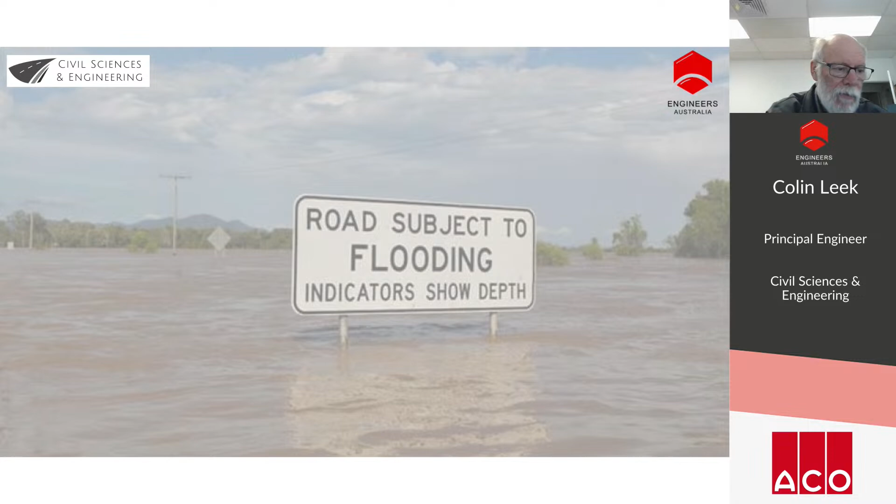Our aim with surface water drainage is basically very simple. We just want to remove that excess water from the road surface, generally following a rain event, although it can be a burst water main. And we want to drain that into a drainage system in a controlled manner as quickly and effectively as possible.

The outcome is a wet but dry road or pathway, but the problem we have is that we do have contaminated runoff.

This has been something that's concerned me for a long time, is where does all the rubber from the tyres go? If you do a little bit of research, you can find that the average life of a passenger vehicle tyre is 40,000 kilometres. And for a heavy vehicle, it depends. If it's a long haul on a rural road, and mostly that's not too much of a drainage problem, you can get 200,000 kilometres out of a set of tyres. But around urban areas, about 50,000 kilometres is considered about normal.

And the average rubber loss of those tyres for a passenger vehicle, it's about 1.2 kilograms. For a heavy vehicle, 12.6 kilos. On a reasonably heavy trafficked urban road, for example, with 10,000 vehicles per day with 10% heavy vehicles, that equates to about 1.12 tonnes per year per kilometre of granulated fine-grained rubber, which ends up in our stormwater systems.

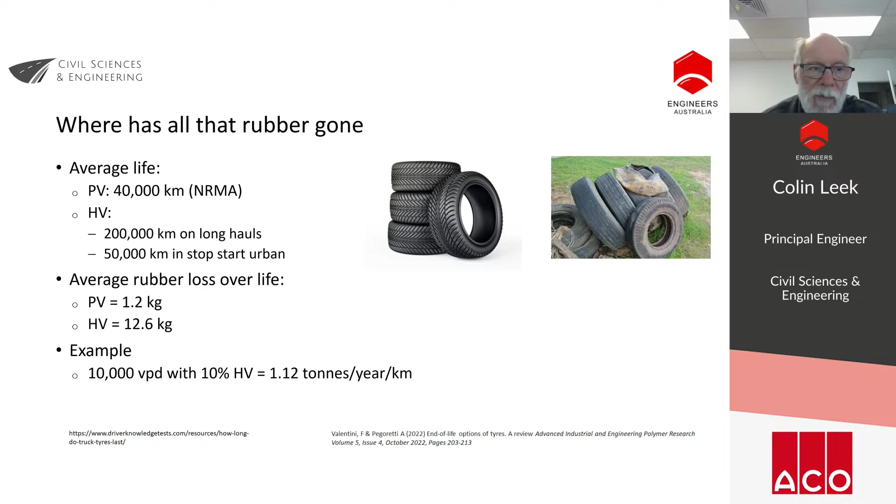So our surface runoff from roads will contain rainfall, and we've got to recognise that with atmospheric pollution, that might not be the pure water that we dream of. That rubber that I previously spoke about, hydrocarbon spillages, exhaust particles, organic matters from vegetation that lines the road or leaf matter that falls onto the road, not to mention dead animals. We've got fertilisers, herbicides and pesticides that might run off from kerb spraying activities or spraying on verges. And then you've got the cigarette butts and other flotsam that comes from us humans, reputed to be the highest form of life, but sometimes I think that's debatable when I see what's in the stormwater systems.

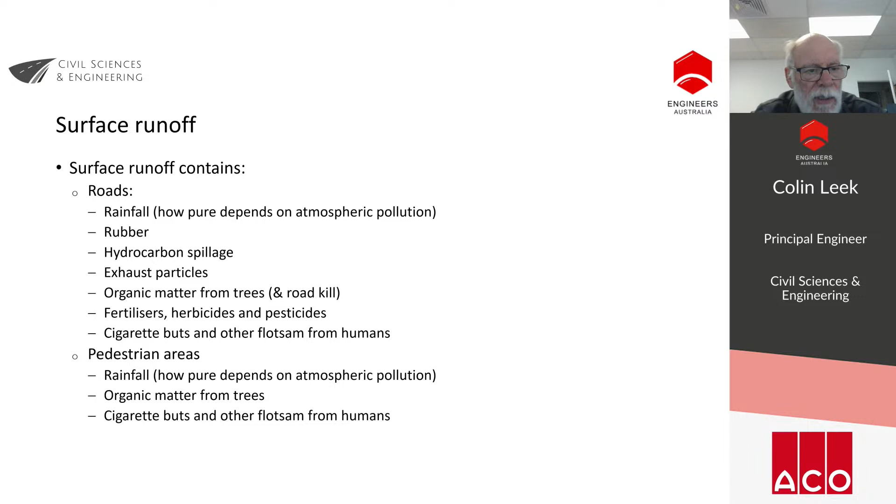In pedestrian areas, we're going to have all of the above, except probably the hydrocarbons, exhaust particles and rubber.

When we're looking at surface water runoff, the first thing we've got to do is get the volume of flow, and that's going to depend on the recurrence interval we design for. That recurrence interval is going to give the storm intensity we're considering, whether it's a 1 in 2 year event, a 1 in 5 year event, 1 in 10 year, and so on.

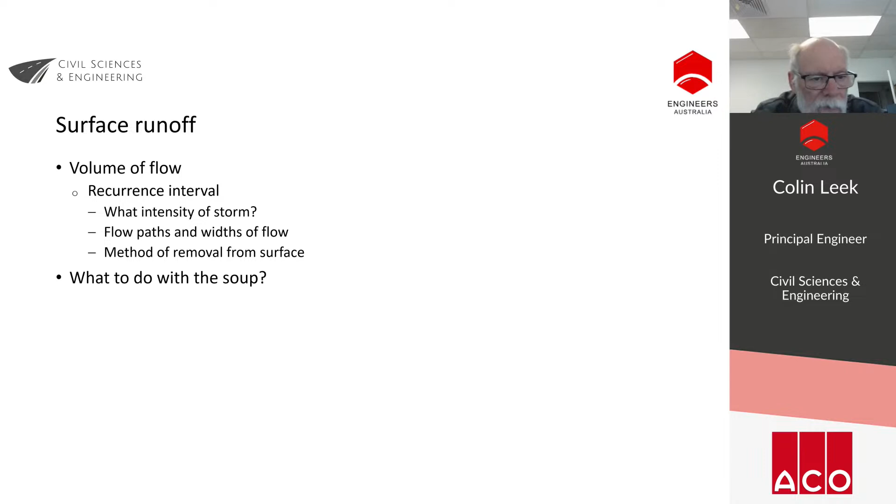Having known the recurrence interval, we need to know something about the flow paths, where that water is going to run, and the width of flow. That width of flow is going to depend on the geometry of your road. Then we've got the method of removal, how we're going to get rid of that water from the road surface - what are we going to do with that soup, that stuff we certainly wouldn't want to eat or drink.

So removal from roads is dependent on the crossfall, which is related to the pavement type. In this presentation we're probably more concerned about kerb type roads, but in rural applications, that crossfall is going to be increased depending on whether it's a spray seal, a gravel surface, or a natural earth surface, and we want to get rid of that water into the table drains.

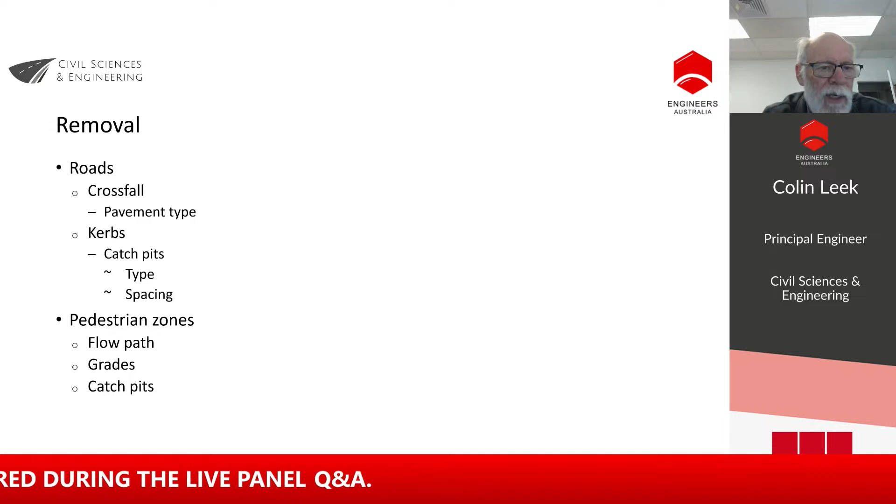But where we've got kerbs, we need to have catch pits, and those catch pit types will determine the spacing of how far apart we need them.

With a steep longitudinal fall, we're going to have high velocity, which means a relatively low flow width. When the road longitudinal grade is pretty small - around where I am, 0.5% is sometimes difficult to get - we've got to introduce that sort of longitudinal grade.

Then you need a relatively good crossfall, to confine that water as close as possible to the kerb. You don't want it getting out into the wheel paths of the road, mostly because that water can cause safety issues as far as stability of the vehicle goes.

But the other issue you have is that vehicles driving along the road in congested areas, if it's in the width of flow, will cause massive amounts of water to be flicked up onto the footpath and any unfortunate pedestrians that happen to be there.

In pedestrian zones, we're still interested in the flow paths, grades and catch pits, but the type of catch pit we need has to be different to what we would have in a road.

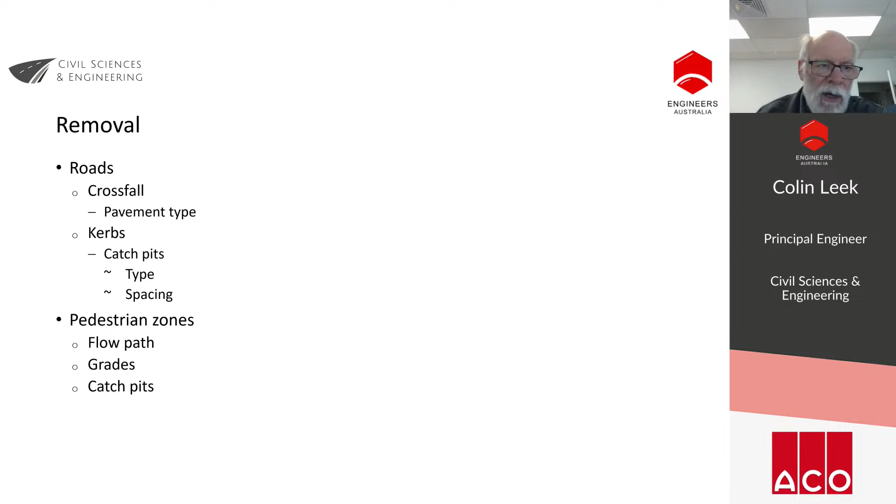But if you're in a clay soil, you might need a subsoil system underneath these to drain the water out. But if you've got a good filter medium where these plants are planted, you can actively control the discharge of water through a subsoil system.

Or other examples are no fines concrete, where the whole block paver is permeable and water can run straight through the block paver and down into the subgrade. The same can be achieved with open grade asphalt, providing you've got a free draining base and sub base.

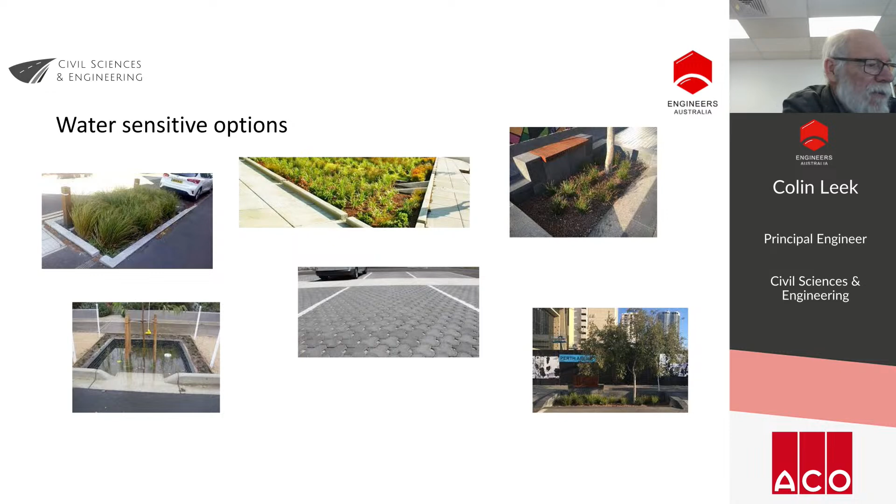So when you're designing a water-sensitive urban design, it's most important to recognise that we do need a pavement that survives. That's particularly important because we're trying to be environmentally sensitive, and if we've got roads which only last a short period of time and we need to plonk more and more asphalt on to keep repairing that particular road, then that's a consistent source of greenhouse gas generation that the environment can certainly do without.

So where does all that soup go? Well, the old way we used to do it, we'd pipe it to the nearest watercourse, and in doing so, we let the wildlife deal with it. If you were a turtle or a fish, maybe you could deal with it, but we humans wouldn't tolerate it. And why should we impose that on the wildlife?

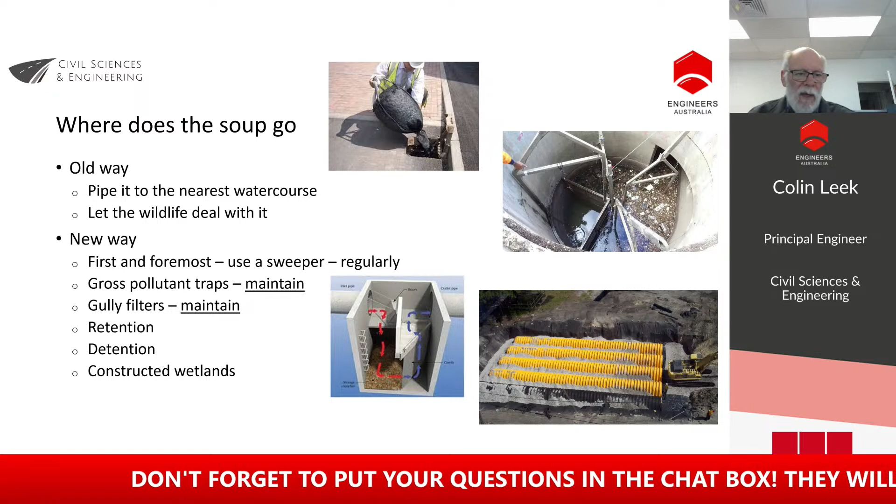Where I used to work, we used gully traps - a square, sort of like a T-piece on the outlet going into the pipe system. That T-piece was aimed to skim off any surface pollution, or it allowed the sediment to build up in the bottom of the gully because it's well below the outlet pipe, and sediment could be retained there. But again, maintenance was important, and those gullies need to be cleaned out regularly.

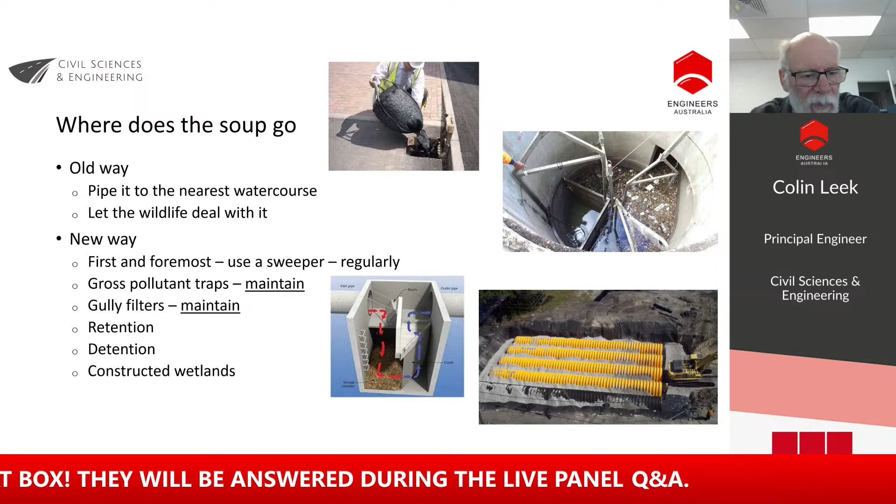We have retention and detention systems - I've got an example here of one of the many I've used in the past, where these chambers are inserted into the ground. It can be in a park, can be under roads - I've installed a lot of these under the road surface. They're designed to either retain or detain, or a combination of both. In a retention system, there's no outfall. In a detention system, you might have an outfall pipe of much smaller capacity than the infall pipe, so the volume of flow is retained in these systems.

What's important with these systems is that they're connected via holes in the side of the chambers, and they're surrounded by aggregate that allows water to flow from one to the other. So when I build them, I put an access chamber in one of those chambers, and that access chamber becomes the cleaning access for getting rid of any debris that might settle out in that primary receival chamber. The other chambers are filtered anyway, so it's very unlikely they'll pose a problem with siltation.

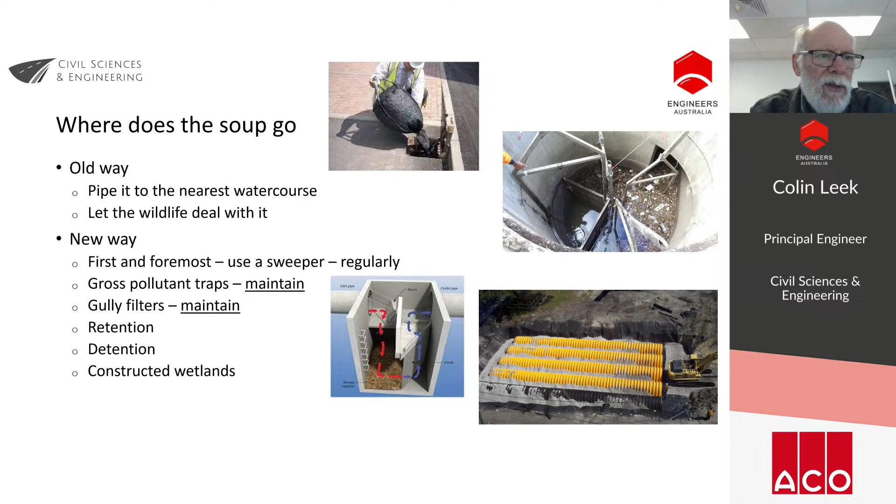The other thing we can do is have constructed wetlands. These are just some examples I've been involved in around the city of Canning, using various methods. Believe me, the flotsam that comes off roads can be devastating to these.

What we found in the early days with one in particular is that there was so much pollution coming through that the reed matter we planted died - it was permanently inundated. We found we had to go and backfill it so that in periods of flow we could turn parts of the system off to be exposed to the atmosphere, and the sunlight would burn off the pollution. By doing that, we managed to get the macrophytes to grow.

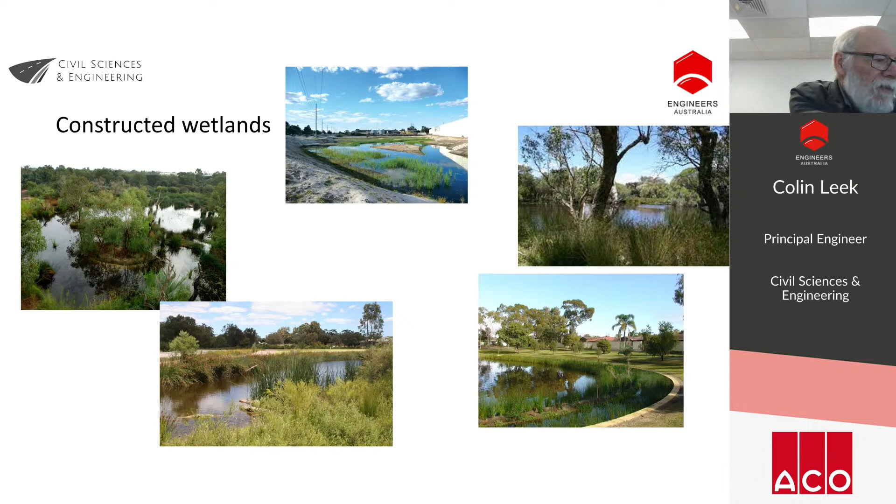It is to my shame now that back in my early career in the early 1970s, working with a public works department in Western Australia, we would go to a perfectly beautiful little stream. As engineers, we'd decide we could make it flow more efficiently to carry water away quicker. So we'd turn that beautiful little stream, that living habitat, into a dead trapezoidal drain that did nothing but carry water - carried it fast, and certainly achieved the drainage requirements, but wasn't good for the environment.

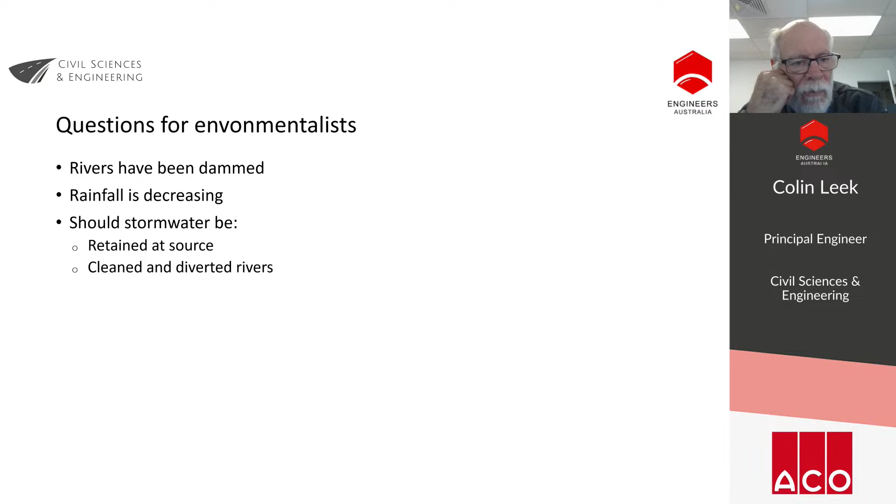I do have a question for the environmentalists in the audience, one I've raised but never had answered. In Western Australia, all the major rivers into the Swan River have been dammed. We've got decreasing rainfall, and river flow has dropped by 75% into those dams, so the dams never overflow. My question is: should stormwater still be retained at source, as water sensitive urban design states we should do, or should it be cleaned and diverted back into the rivers to restore some of that lost flow?

The other thing we have with stormwater systems is pits in the road. What I've noticed is that you used to be able to buy Gatic covers—Gatic was a trade name. They were Australian made, and you could put them in a road and they'd last for decades. I've got these in existence, Australian made, that have been surviving for 50 years.

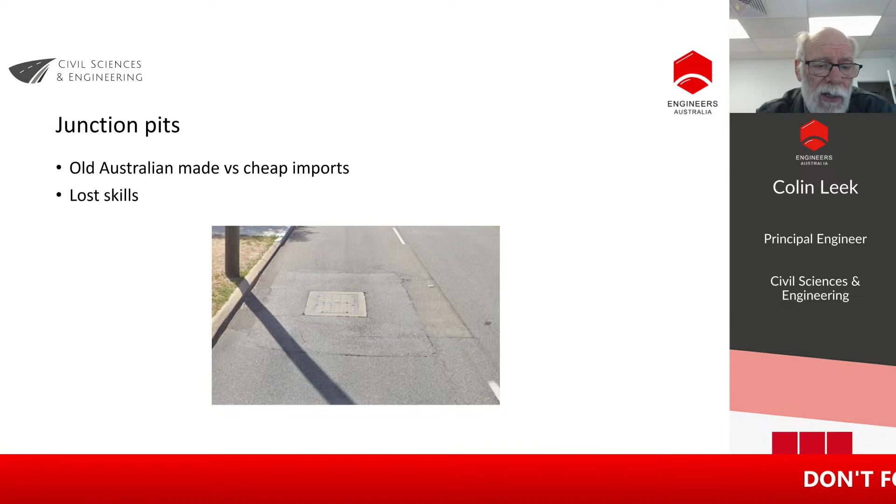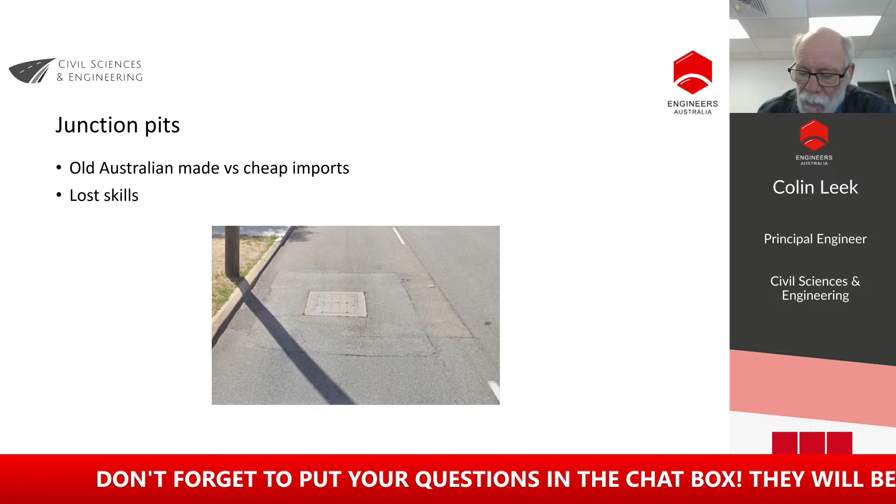Unfortunately, importers got on the bandwagon with stuff from China and India, which didn't have the lifespan. They rattle and bang and lose stability. Once they start to rattle, the impact forces break the bedding, and they become unstable and a never-ending maintenance item. There's also a lost skill in getting these level enough that they don't disturb adjoining residences. In the past, you could drive across one and not notice it. This one has had at least four attempts to get it level so it doesn't disrupt adjoining residents with noise, but to no avail—still noisy.

But the issue is that pollution and debris get down into the system far more easily, meaning gross pollutant traps have to work harder. Also, with all the grated ones, every time you resurface, you've got to either raise the gully or, if you keep the road level the same, work your way around those gullies to match them—profiling out your asphalt to make it level again, which is much easier to deal with using a side entry gully.

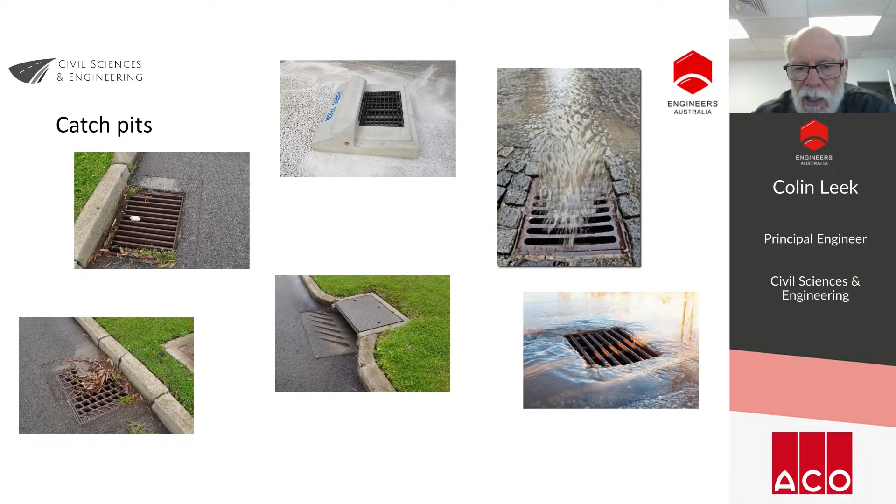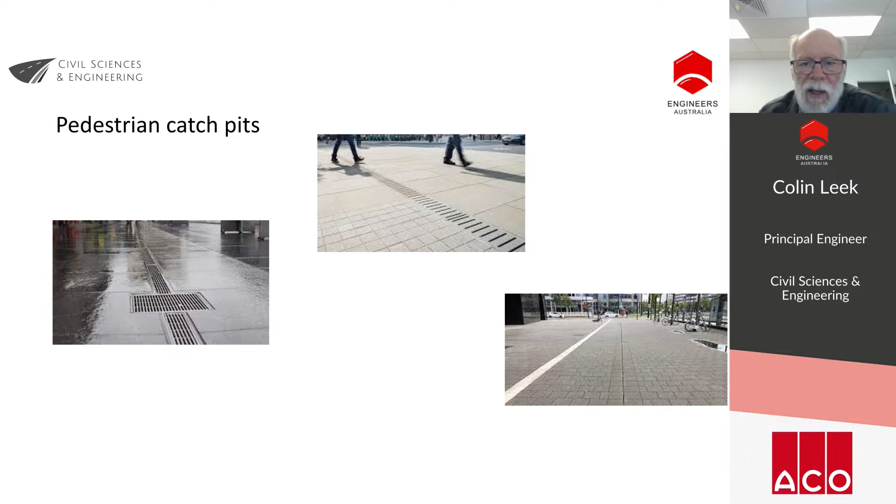Good afternoon everyone. My name is Darren Chan, and I am the Brand Manager for ACO Civil Construction Products. Before I go on, I want to thank Engineers Australia for hosting this webinar and to Colin Leek for an excellent presentation. So today, we're going to look at surface drainage in roads and shared spaces.

We will begin with surface drainage for roads.

Looking at modern road drainage designs, we have a lot of challenges from our growing population. As our population grows and cities become more densely populated, engineers are tasked with designing effective road networks and integrating drains and other services in narrower road corridors, either to widen or reconfigure existing roads or to extend or add lanes for turning bays at intersections. Beyond just trying to fit more into a smaller space, other challenges include connecting into an existing stormwater system that can't cope with the increased flows from new developments, and trying to avoid clashes with underground services.

The primary objective of road drainage is to ensure the safety of all road users, whether motorists, pedestrians, or cyclists, by reducing the depth and width of flow. Managing, reducing, or eliminating sheet flow and the spread of gutter flow will minimise the risk of hydroplaning and vehicles losing control, and slips, trips, and falls from pedestrians as well.

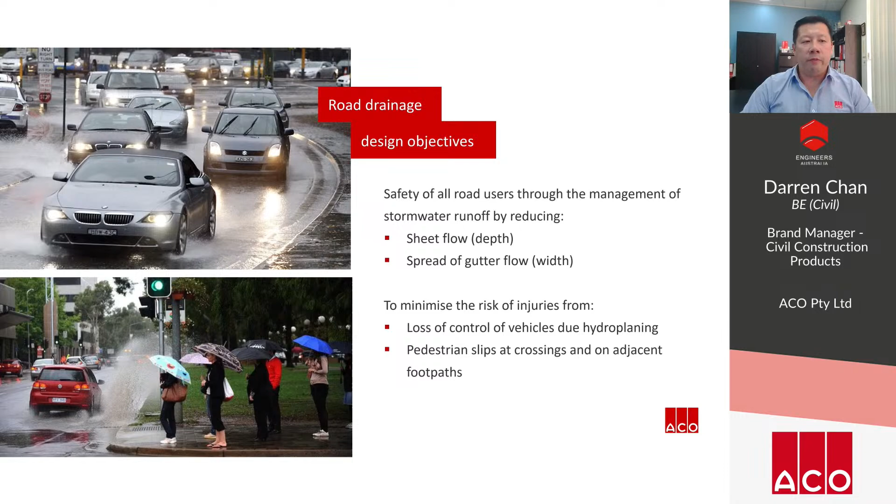Surface runoff on roads is collected and channeled along curbs, gutters, and medians on super elevated roads. Inlet structures are used to capture surface water and transfer it to underground pipe systems. This could be at a sag point to prevent ponding, on grades before the water depth, width, and velocity becomes a hazard, at approaches to intersections, upstream of pedestrian crossings, and at bus stops where people congregate.

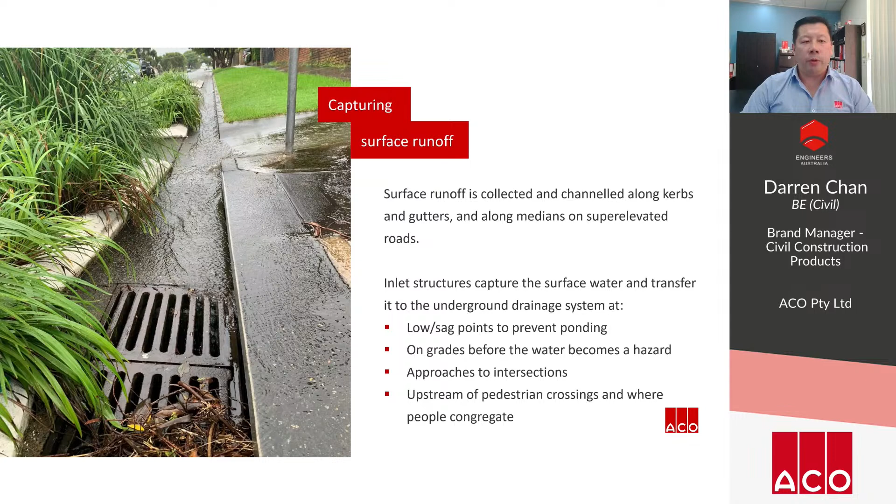There are three traditional types of road drainage inlets available: side entry inlets through openings in the curb face, grated gully pits positioned in the gutter, or a combination of the two with an extended side entry.

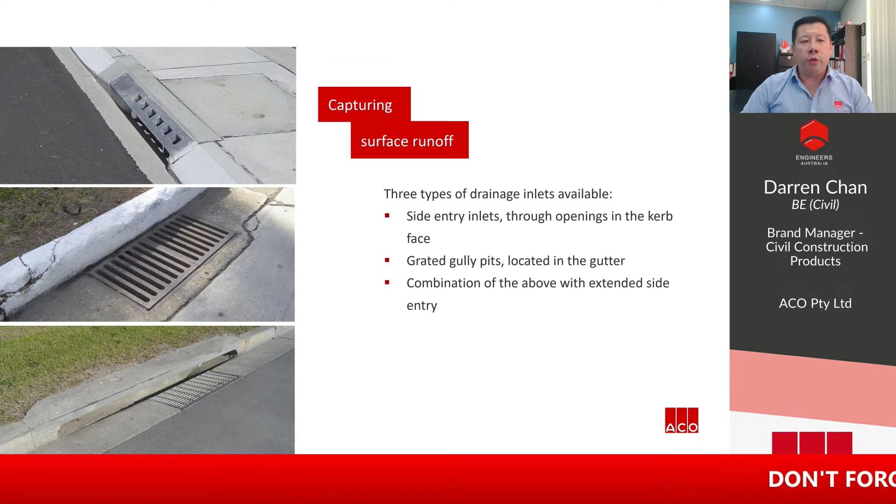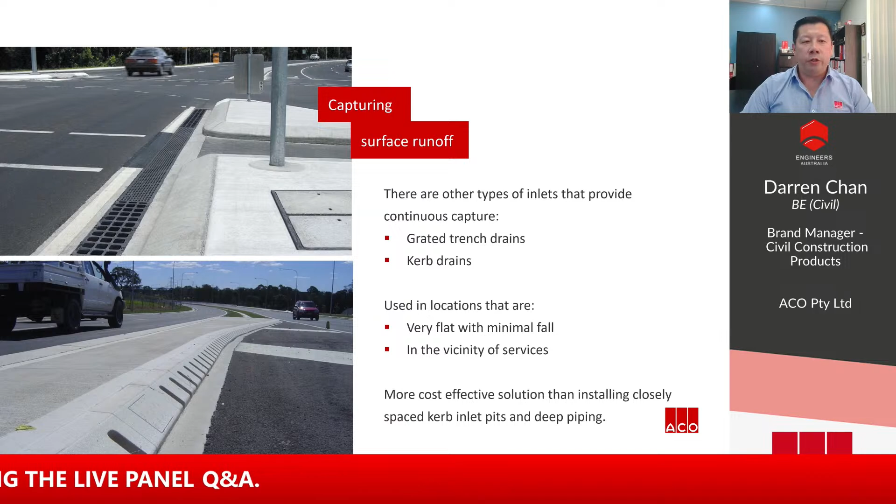You can also capture water continuously rather than intermittently, using either grated trench drains or curb drains. These would be used in areas that are very flat with minimal fall, or have services in the ground close to the surface. These continuous capture systems are more cost-effective solutions than installing closely spaced traditional curb inlet pits and deep pipework.

Austroads released a guide to road design with an expanded drainage section in 2013. It was written with a consortium of all the state road authorities. Since this document was published, continuous capture inlet systems have become a more accepted method of draining road pavements in certain applications.

Let's focus now on continuous capture inlet systems. Grated trench drains are one type of continuous capture inlets. Due to the rainfall variance in Australia, 200mm or 300mm wide channels are commonly specified as they are compact with variable depths to ensure the runoff is discharged efficiently.

There are generally three types of grates: high flow with large apertures, heel-safe for pedestrian safety, and transverse slotted grates. Grates must be load rated to AS 3996 Class D and preferably fitted with boltless locking mechanisms that allow quick access for maintenance to clean out the trench drain from time to time.

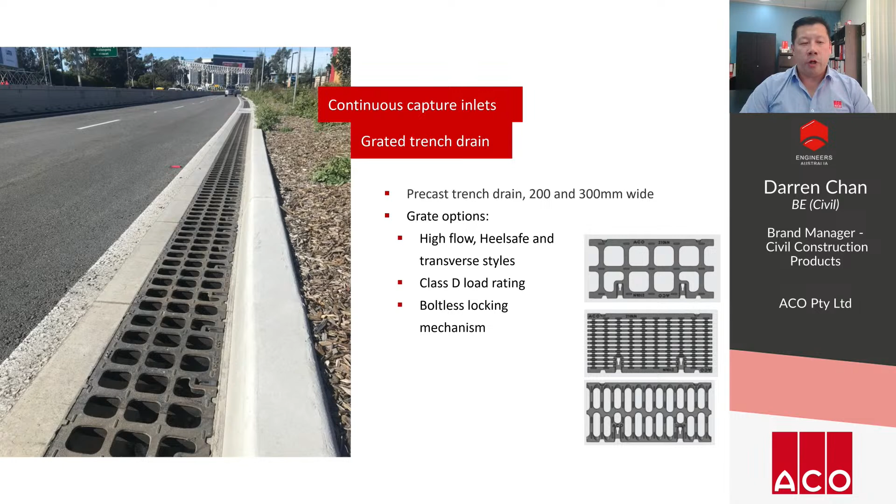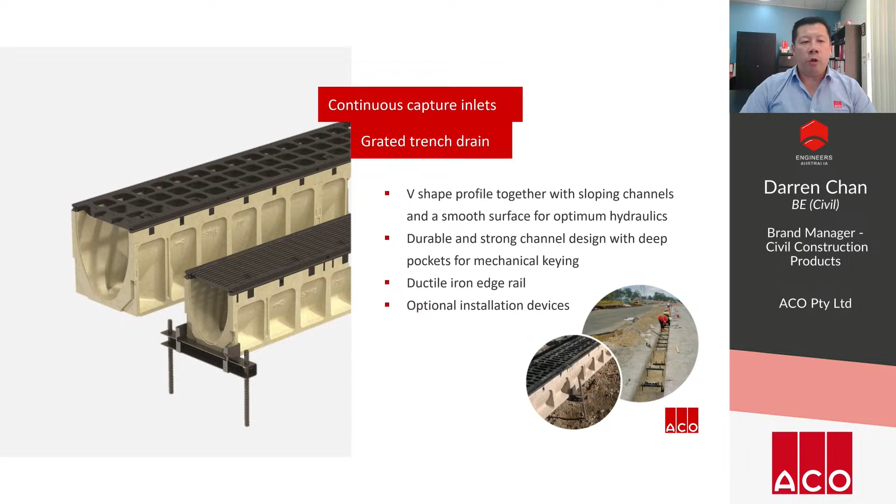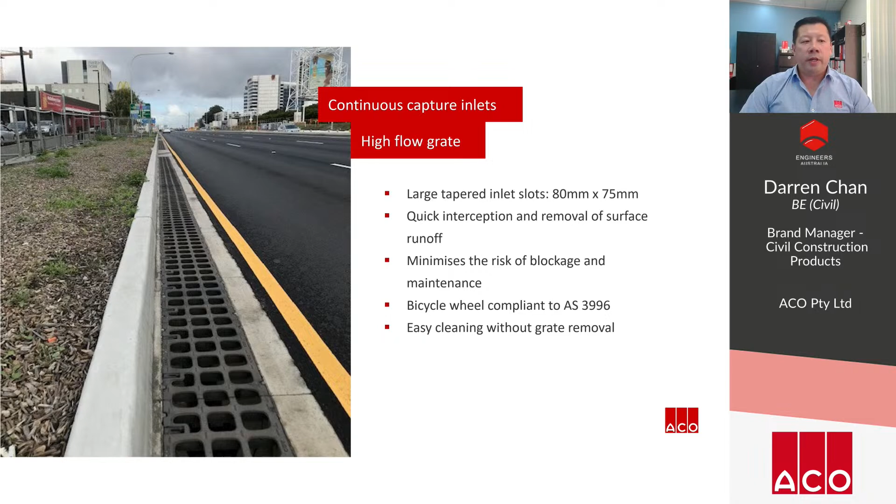High flow grates have large high capacity inlet slots, allowing runoff to be quickly intercepted and removed from the road. These large intakes also minimize the risk of grates blocking up and spreading flow into traffic, creating hazards to motorists. Even though these grates have large apertures, they are bicycle compliant to AS 3996, meaning bike tyres are unlikely to get stuck in a grate, causing injuries to the cyclist.

These large apertures allow the channels to be cleaned without removing the grates. A sucker truck with a high pressure washer is used to break up the sediment and wash it down to the vacuum pump, which sucks up all the suspended silt into the truck. All this can be done without unlocking or removing any of the grates.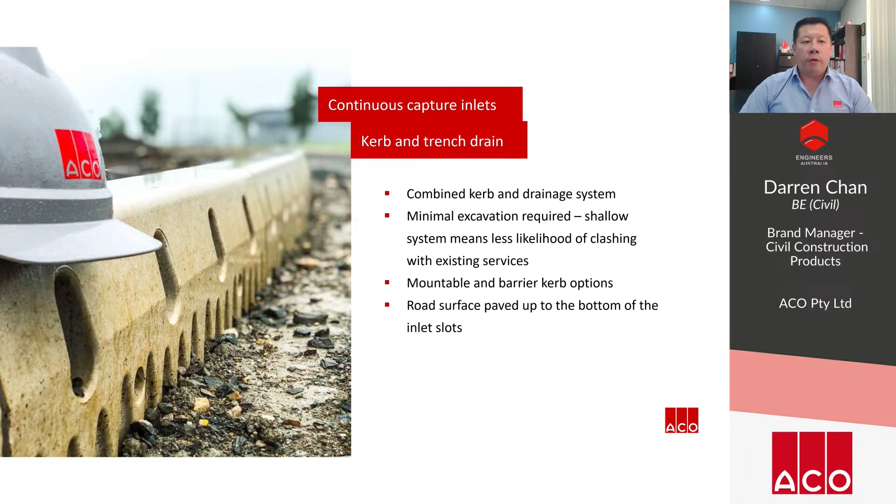Another type of continuous capture inlet system is the curb drain. This product combines two functions, the drainage channel with the curb itself. It's a shallow solution that requires less excavation for installation, therefore less likelihood of clashes with existing underground services. Options include semi-mountable and barrier type curb profiles, depending on the specific area within the roadway.

There are narrow 100mm wide curb drains which are ideal for minor roads in council areas and a good compact size for smaller catchments. The 200mm wide curb drains are for major roads and larger catchments. Semi-mountable curb drains are used in medians predominantly. The barrier curb drain is the non-mountable option used adjacent to footpaths. Precast curb drain channels are encased in concrete and tested to AS/NZS 3996 Class D loads.

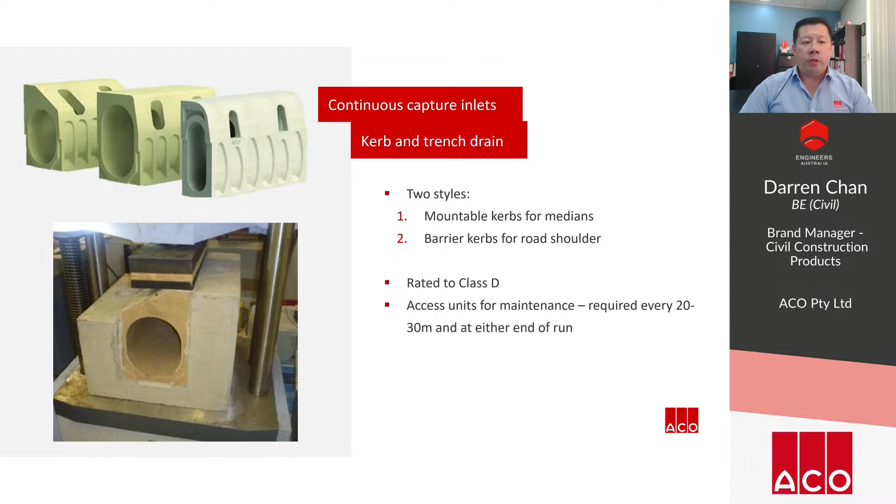Access units are required at regular intervals, say every 20 to 30 metres, to provide access for cleaning and maintenance. Now I'll quickly run through some installation examples of where graded trench drains and curb drains have been used on different parts of roads and highways.

For medians, they might be used to eliminate the spread of gutter flow into the traffic lanes by continuously capturing the water rather than traditional pit and pipe construction. Curb drain is a smaller system, so depending on the hydraulic capacity requirements of the project, wider and deeper graded trench drains might be a better option.

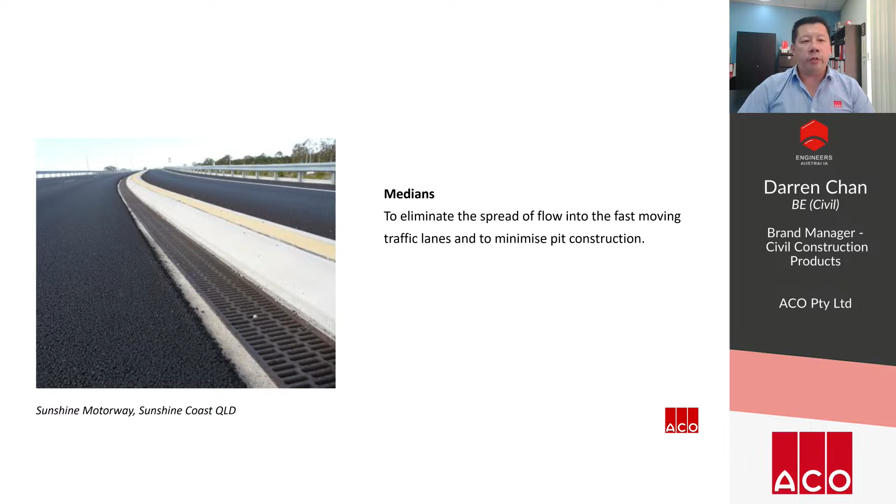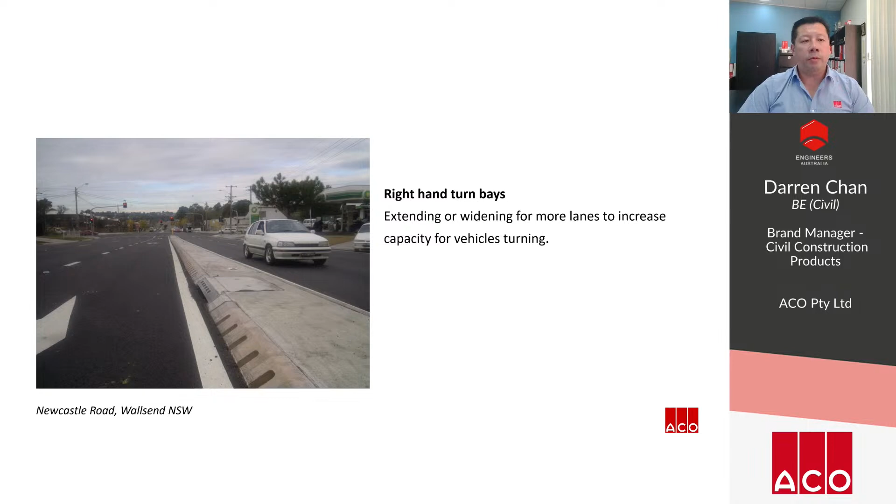For right-hand turn bays where you're trying to fit more lanes into a smaller area, curb drain can be a helpful solution to give as much space to the roadway as possible. Some engineers and road authorities may prefer graded trench drains to curb drains in this application.

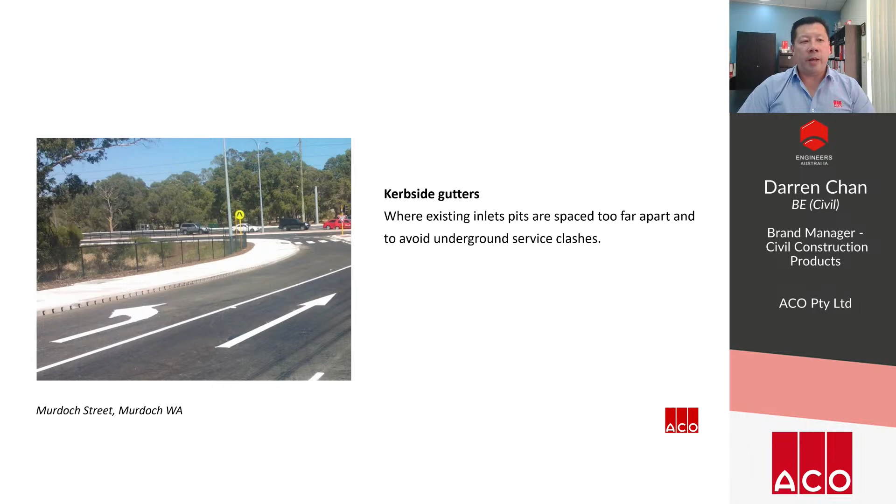And in curbside gutters where existing inlet pits are spaced too far apart, resulting in hazardous spread of flow, curb drain can be used to continuously capture the gutter flow to minimise the risk to motorists. Or again, a graded trench drain solution can be used.

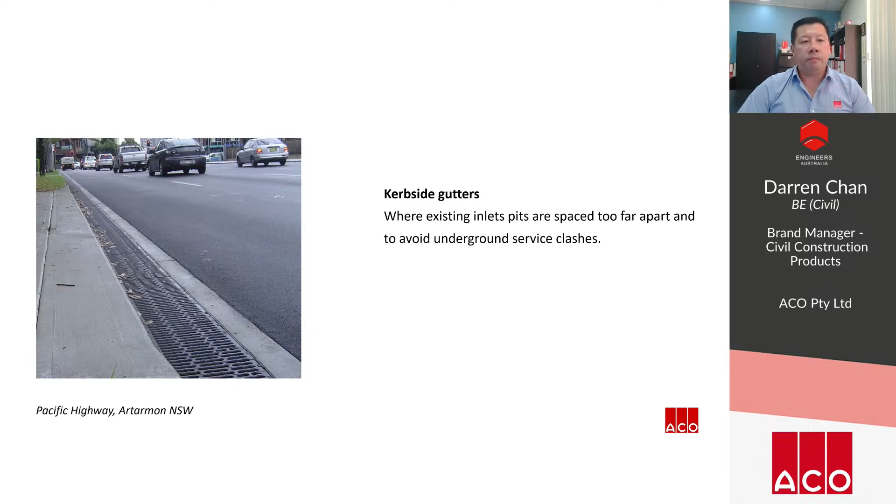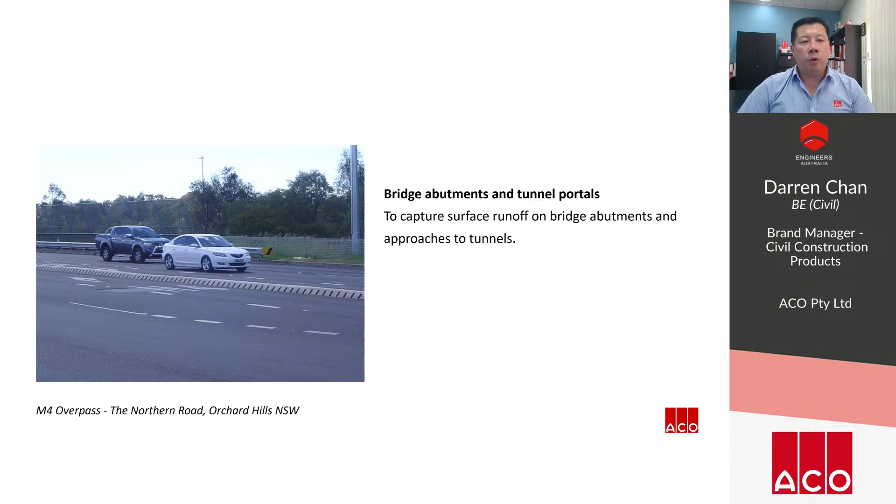And on bridge abutments and tunnel portals, you can again use curb drains or a grated trench drain solution.

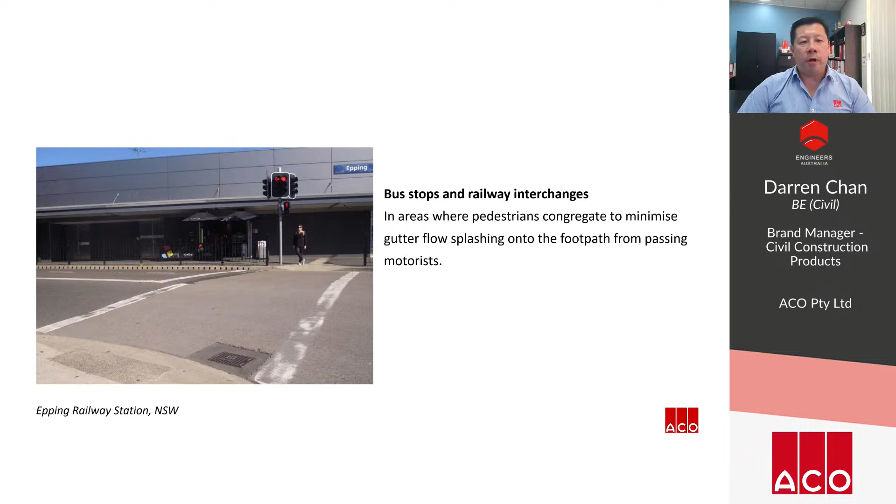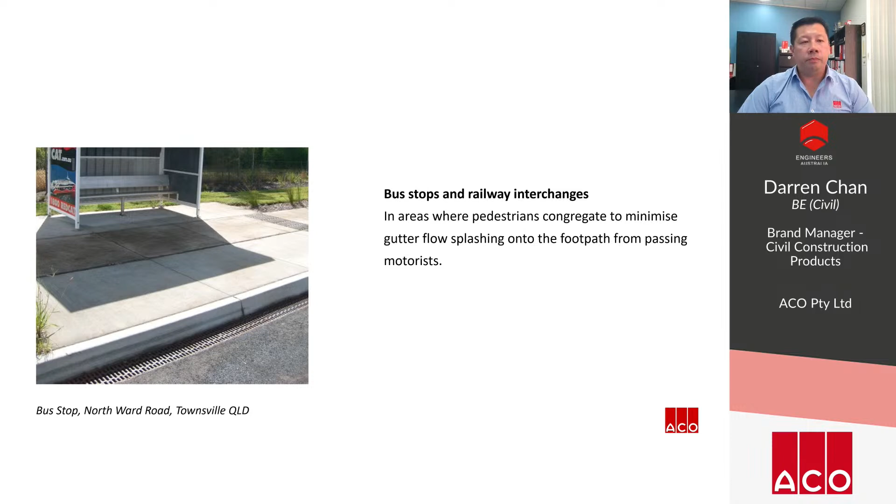Bus stops and railway interchanges are areas where we have a lot of commuters, and during storms we don't want anyone to get splashed by motorists. So again, we can use curb drains to get the water off the road quickly, or a grated drain too.

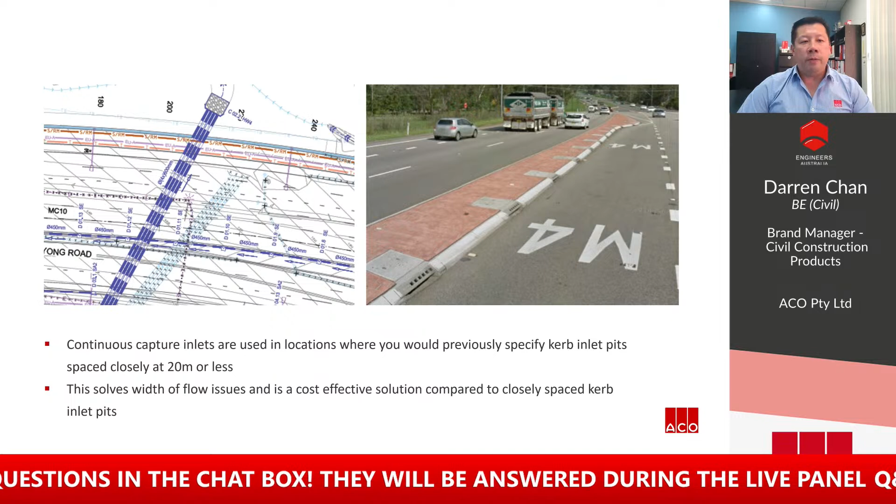A big driver on every project is cost. Precast curb drains and grated trench drains are ideal for applications where curb inlet pits would otherwise be spaced closely together at intervals of 20 metres or less. It's more expensive to install pit and pipe in these applications than a grated trench drain.

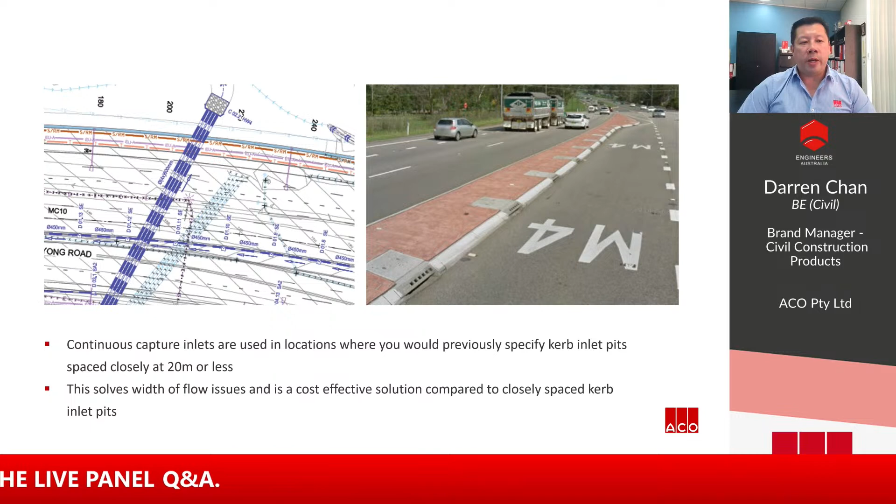This is an example of a road project. The designers opted for closely spaced pits and pipe where a continuous capture inlet system would have been a more cost-effective solution.

We've carried out an installed cost analysis of a curb inlet pit and pipe system compared to a precast grated trench drain and curb drain system. The outcome was the grated trench drain was 15% cheaper than the pit and pipe, and the curb drain was 36% cheaper - quite significant savings.

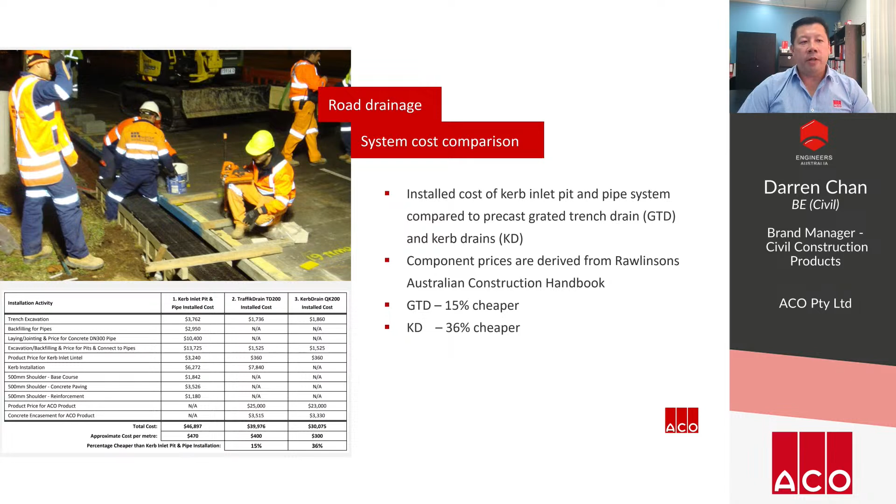Finally, for road drainage, precast channels can be installed on curves. This can be done by opening up a gap on the inside or outside edge of the channel for gentle curves on a larger radius, or by grinding and mitering the channel units on site for tight curves with a smaller radius.

For example, on an intersection upgrade and widening project where Telstra services were clashing with the pit and pipe design, they designed and installed a shallow curved grated trench drain to act as a pipe, moving the runoff around the corner of an intersection to discharge into an existing curb inlet pit. This avoided clashing with the existing underground Telstra infrastructure or the need for costly relocation of these services.

We will now look at shared spaces and the important considerations to correctly specify and integrate a surface drainage system that is safe for both pedestrians and motorists. Shared spaces are increasingly transforming city centres, transport hubs, and public domains into an inviting space that is accessible to all users.

This is how Austroads describes shared spaces, or a shared zone: an area utilised by both pedestrians and vehicular traffic, in which drivers must give way to pedestrians at all times and where the street environment has been adapted for very low-speed vehicles. Shared zones are normally used in areas of high commercial activity, medium to high density residential areas, or recreational areas.

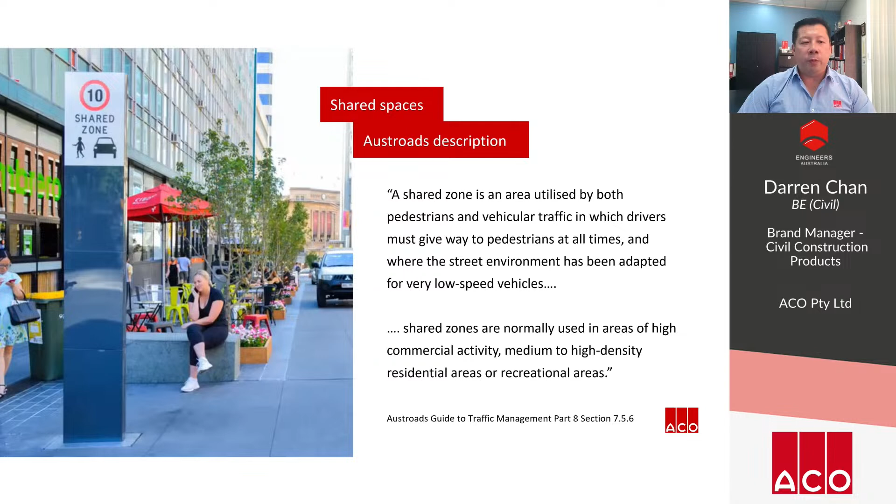Ideally, shared spaces are located in areas with relatively flat pavements, and surface drainage needs to be designed with an appreciation of the grate slot sizes, slip resistance, loading, durability, and must be accessible for the safe passage of both pedestrians and motorists.

So creating these walkable cities leads to all these community benefits and creating spaces that people want to be in.

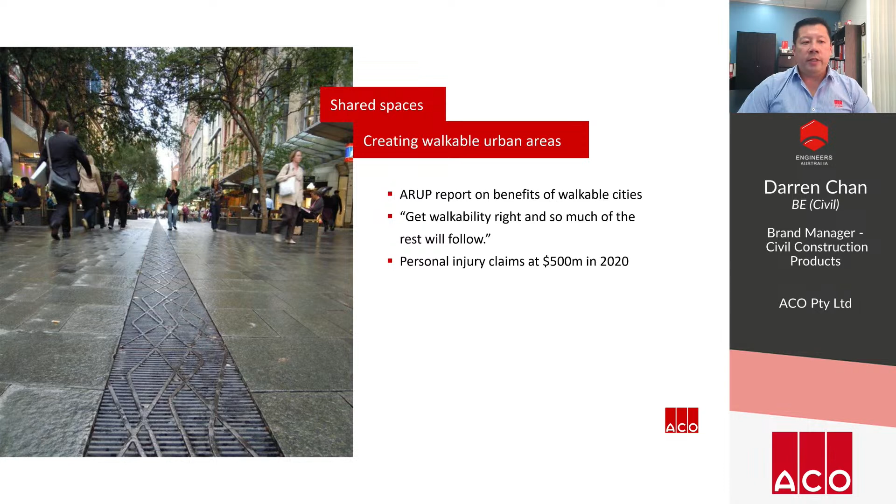There are many other reasons driving the importance of shared spaces, and whilst urban designers must consider many stakeholders, the needs of pedestrians should come first. The risk of slips, trips, and falls in poorly designed pedestrian areas is high, and the legal consequences of these accidents can be quite extreme. With $500 million of injury claims in Australia in 2020, this is a significant cost and risk that we need our designs to help mitigate.

So with any application or product, compliance with relevant legislation and standards is vital and will help solve many of these problems. When it comes to pedestrian safety for pavement elements, the requirements are spread through a number of Australian standards because of the multitude of factors that need to be considered. We'll look at those standards in more detail shortly. In addition to Australian standards, many councils have their own planning regulations, particularly when it comes to streetscapes. If there are no applicable Australian standards, European or other standards are referenced.

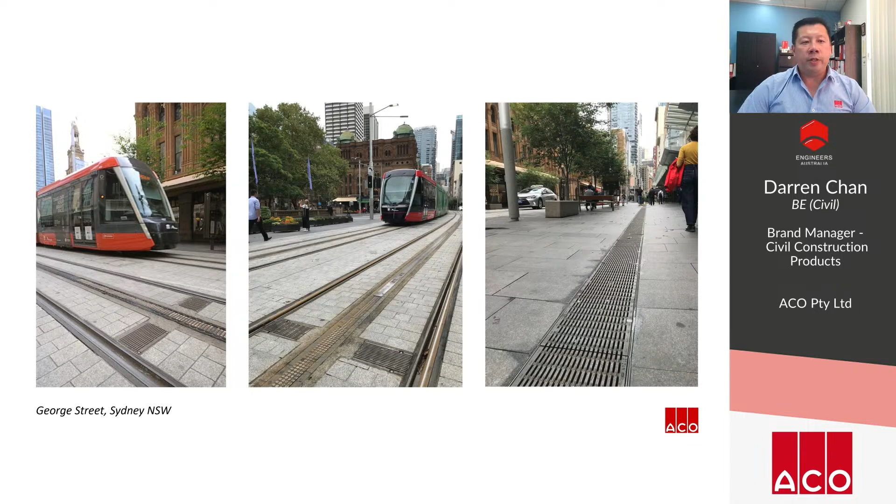George Street in Sydney has been converted into a shared zone, with pedestrians, trams and vehicles accessing buildings. A flat space was created with the removal of curbs and gutters. Graded trench drains and specially designed tram drains were used extensively throughout the light rail corridor.

Victorian projects where curbs and gutters are removed and replaced with graded trench drains to allow pedestrians to move in all directions in that space.

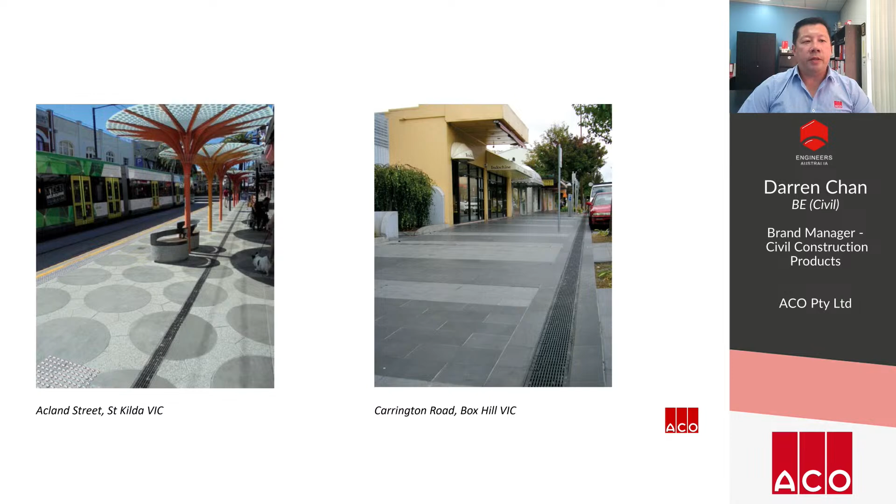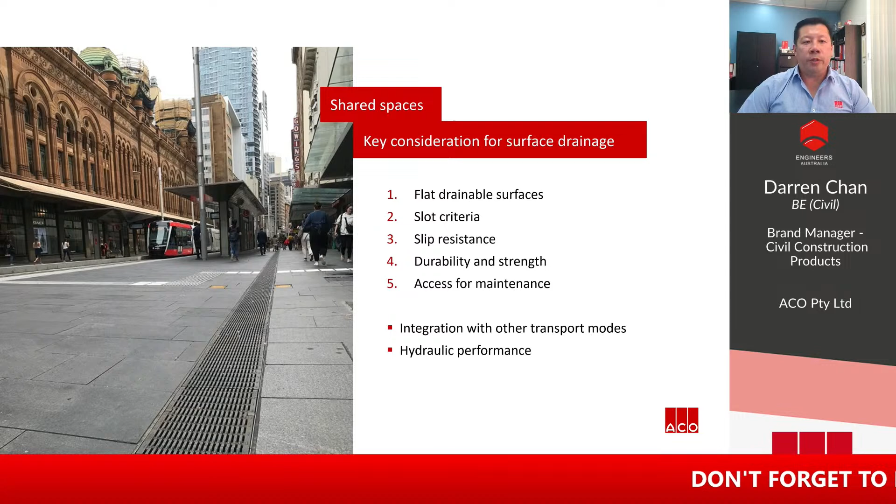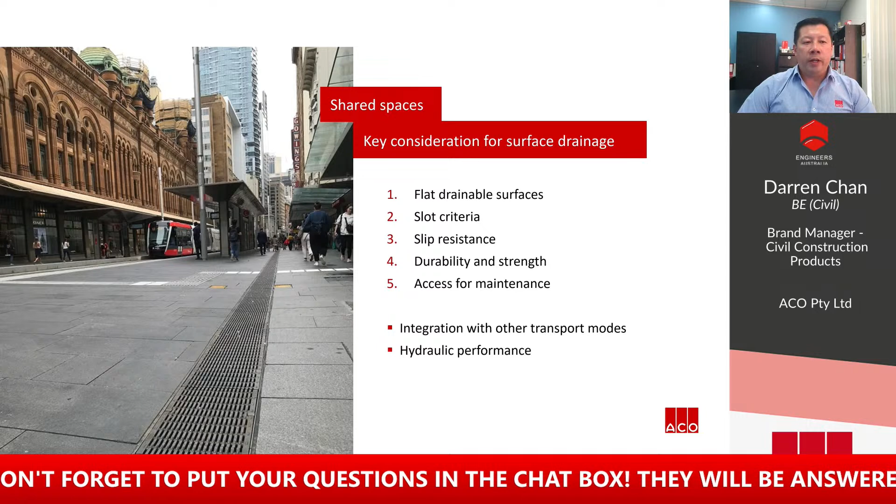We will now look at some key factors to consider when designing a drainage system in a shared space. Here are the 5 key considerations when integrating drains into pavements to achieve those objectives of safety, form and function: flat drainable surfaces, slot criteria, slip resistance, durability and strength, and access for maintenance. Then we will discuss how drainage in shared space will integrate with other transport modes and discuss hydraulic performance, as it's a critical factor.

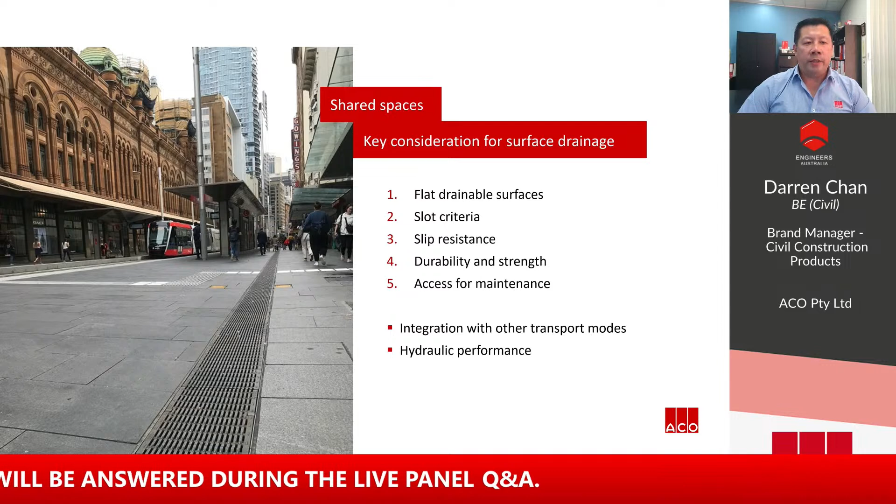Uneven or steep pedestrian spaces will create trip hazards, particularly for the elderly, children, and those with a disability. Surface water management often leads designers to create steep pavements, but they can be designed flat if drainage is properly considered and incorporated during planning.

Graded trench drainage systems are continuous capture inlets with simple constant grading on both sides of the drains. As discussed earlier, precast drainage channels with a V-shaped profile have hydraulic advantages over U-shaped channels, particularly during low flows with higher velocities. For pavements that are flat, channels are available with built-in slopes in the channel invert, providing internal fall to promote efficient drainage.

Precast trench drainage systems are quick and easy to install, particularly compared to cast in situ drainage.

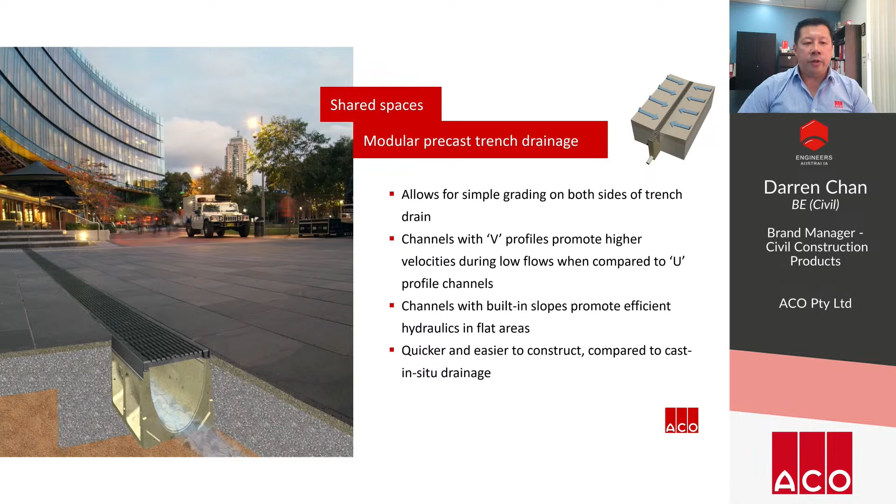The next element to consider is slot sizes. Slot sizes are critical for pedestrian safety and should also not hinder accessibility for wheelchairs and walking canes. New building works must be designed to comply with the Disability Discrimination Act. The DDA makes it against the law for public places to be inaccessible to people with a disability. Slot sizes and grades will also determine how safe it is for cyclists and pedestrians wearing high heels or stilettos.

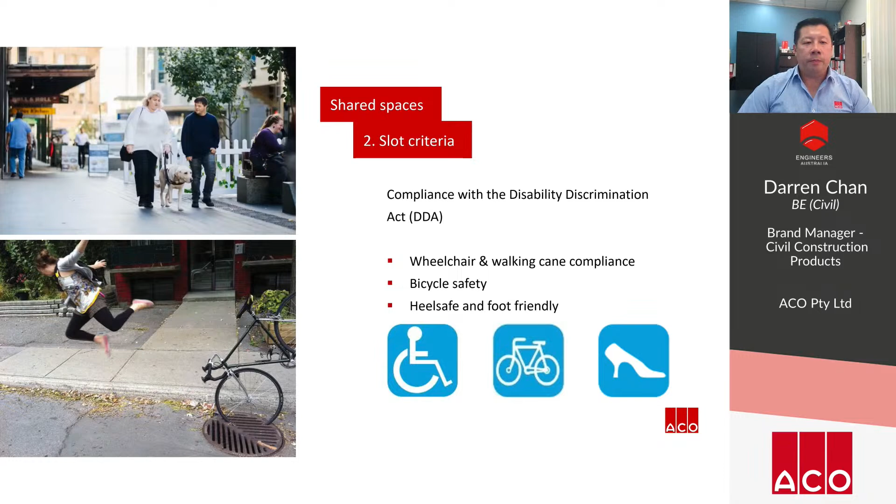AS 1428.1, Design for Access and Mobility, was revised and released in 2021. Clause 4.4 states the following: grates in paths of travel shall be in accordance with the following.

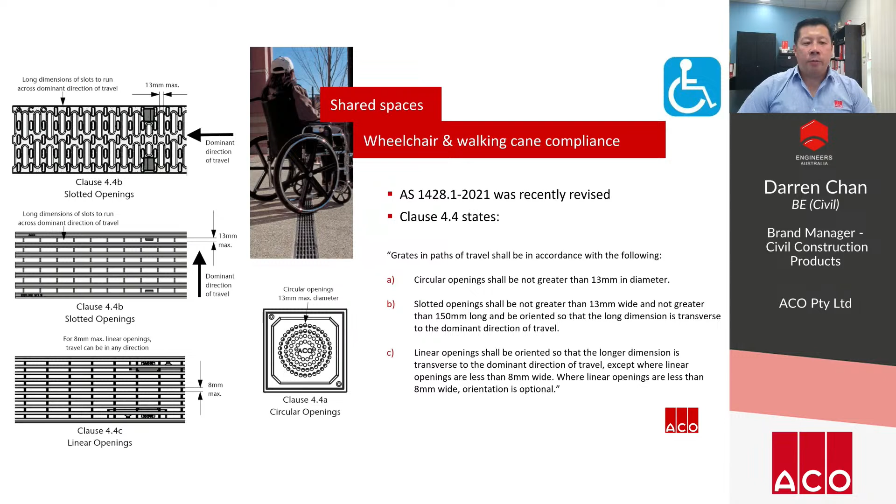A: Circular openings shall be not greater than 13mm in diameter. B: Slotted openings shall be not greater than 13mm wide and not greater than 150mm long, and be oriented so that the long dimension is transverse to the dominant direction of travel. C: Linear openings shall be oriented so that the longer dimension is transverse to the dominant direction of travel, except where linear openings are less than 8mm wide. Where linear openings are less than 8mm wide, orientation is optional.

Bicycle safety is mandated by AS 3996, which takes into account the type of bar used in a grate and the maximum slot dimensions to stop bicycle tyres getting wedged in the grate.

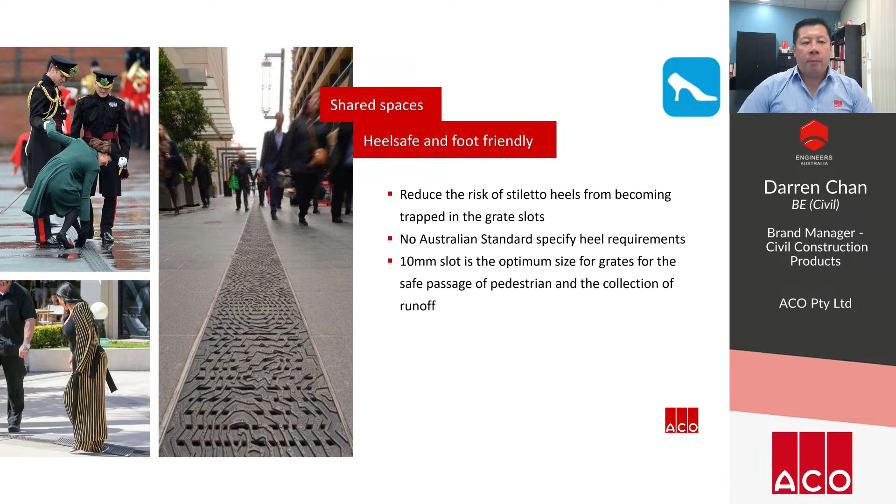Heel safety is one of the most common complaints from users. Whilst there is no Australian standard for heel safety, there is an American standard that calls for slots less than 8mm. There's a trade-off here between hydraulic intake and heel safety, so we don't want to see very narrow gaps that, whilst they are heel safe, don't actually collect much runoff and are more prone to blocking up. As a result, we lean to a guideline of 10mm.

Slip resistance is becoming a major concern for asset owners as litigation increases arising from slips, trips and falls. AS 4586, with a supporting handbook HB 198, stipulates the slip resistance ratings for a variety of applications. AS 4586 outlines 3 test methods to simulate different applications as a means to assess the slip resistance of a grate.

The oil-wet ramp test, with ratings of R9 to R13, is designed for industrial and commercial environments where there is likely to be oil on the floor, for example in workshops and commercial kitchens. The wet barefoot test, with ratings of A, B and C, is designed for wet areas with bare feet such as pools or change rooms.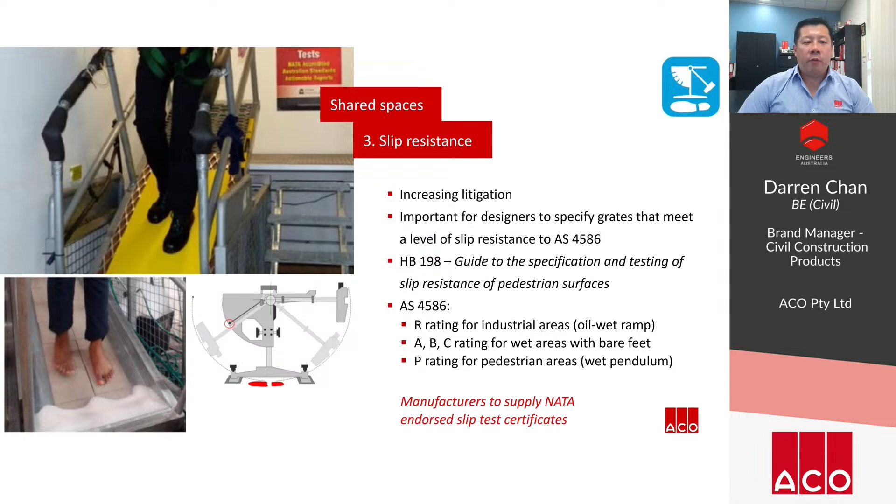Lastly, the wet pendulum test, with ratings of P0 to P5, is the most widely used test. This test is most suited to areas that are rain affected, such as shared spaces and building entries.

Next up is loading, and considering the anticipated vehicle load that a drain will be subjected to is critical. Underestimating this can lead to product failures, and overestimating it adds unnecessary costs. Load isn't just related to the physical load of the vehicle — we must also consider the type and speed of vehicles, the wheel load, how the vehicle will move over the grate, and the number of movements.

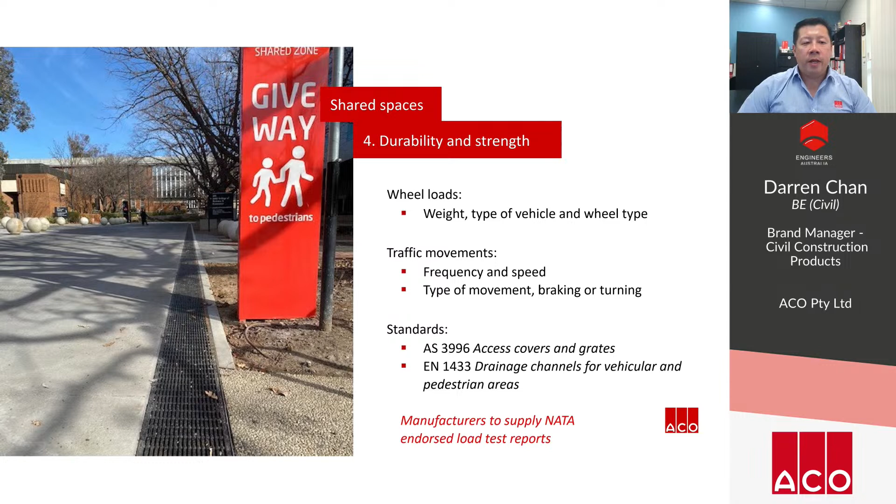AS 3996 is the Australian standard for access covers and grates. This standard provides a means to test a grate to determine the load classification, but it doesn't take into account the underlying drainage structure. However, EN 1433 is a European equivalent, and it includes testing for the drainage channel.

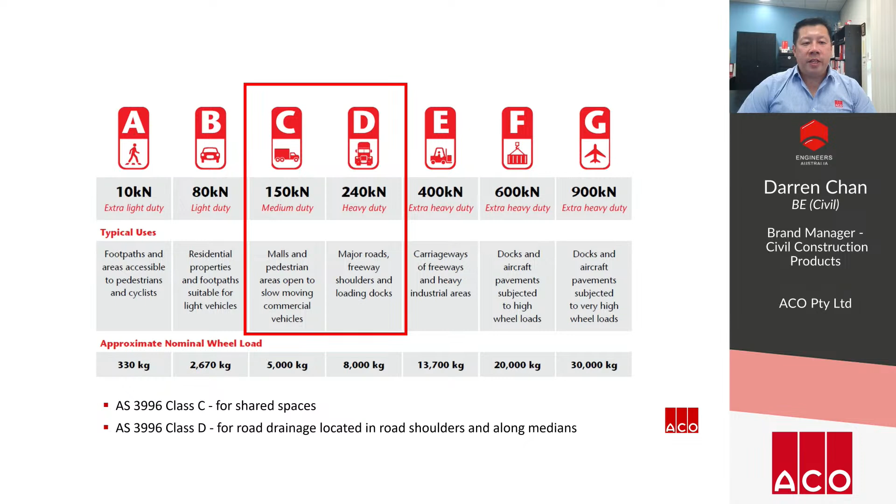This table looks at the load classes specified in AS 3996. It classifies applications for pedestrians as load class A, all the way up to aircraft pavements as load class G. Shared spaces will fall into load class C: malls and pedestrian areas open to slow-moving commercial vehicles. Road drainage is to be specified as load class D for major roads, freeway shoulders and loading docks.

If grates aren't locked into the channel, it can damage both the channel and the grate. A boltless locking system on grates is quick and easy to use to gain access for cleaning. The other option is bolted grates, which has the risk of the bolts vibrating loose during service. It's also common to see bolts removed during maintenance but not secured back in place, causing safety risk and hazard for loose or misplaced grates.

Slot drains require discrete access points that help preserve the visual continuity of the pavement. Access points are installed at the start and end of every run, and every 20 metres or so throughout, to provide access for maintenance.

With state governments all over the country investing billions of dollars into public transport, new metro lines and light rail projects are connecting commuters from their place of residence to city centres, transport hubs, hospitals, tertiary institutions and entertainment precincts, creating shared spaces in and around each of the stations.

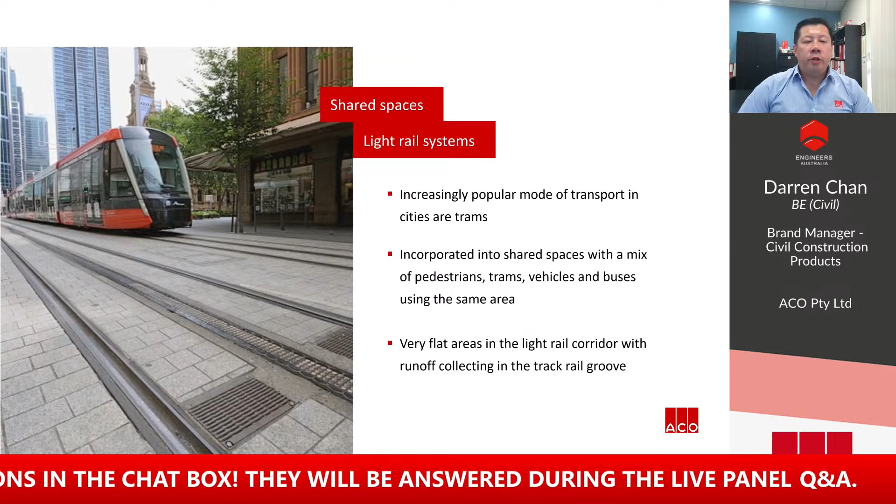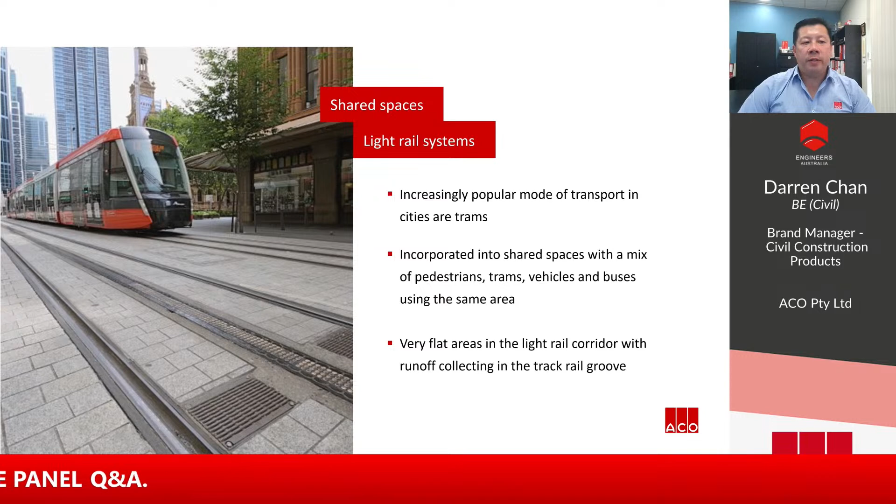Light rail systems have been established in many cities and new lines are constantly being designed and delivered. Light rail, more so than metro lines, runs on the surface and is incorporated into shared spaces through high pedestrian trafficked areas. Designers are challenged to provide an effective drainage solution in very flat areas with the complexity of draining the track rail grooves.

Specially designed tram drains discharge the flow from the track rail groove through holes drilled into the rail, into a chute connected to a trench drain and a pipe system. The chutes are made from rubber and are also used to isolate any stray currents from the track rails, which could potentially make the grates live and hazardous to pedestrians.

Tram drain grates should be designed to take into consideration the five key factors discussed earlier.

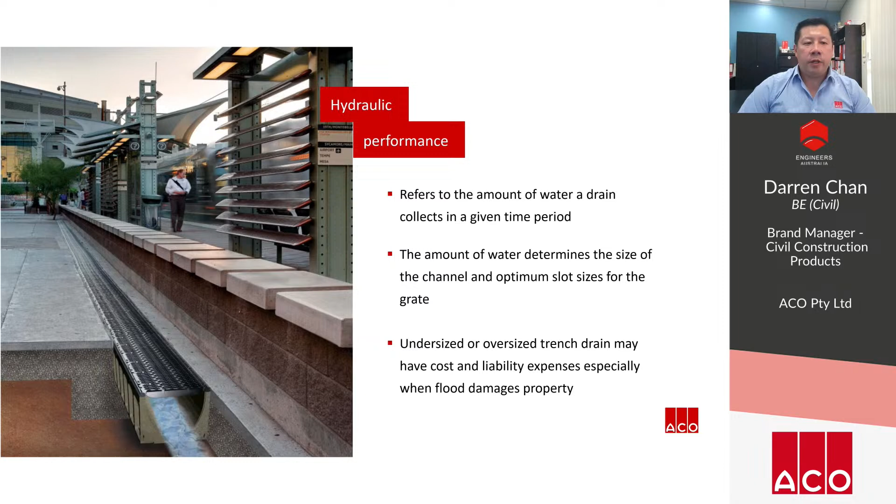Absolutely critical to selecting a drainage system is the hydraulic performance, and whether it will do what we need it to do. Hydraulic performance refers to the amount of water a drain collects in a given period of time, and that drives the product selection not only for the channel, but also the grate, as the grate in some cases can be the restricting factor. An undersized drainage system can increase the risk of hazards and damage to property if the flows are not captured, but conversely, an oversized system just adds unnecessary cost into a project. So how do we get this right?

The science behind the hydraulics of trench drainage is complicated, and there are many theories and equations to calculate it. It's common for designers to use simple pipe or open channel theory as a means to calculate drainage capacity. However, this assumes that the flow in the channel is uniform. This might work for a culvert or for a pipe where liquid moves from one end to the other.

Non-uniform flow is a more accurate way to model a trench drain's hydraulic performance, as it takes into consideration the collection of flow along the length of the trench drain, which is used to plot the changing water profile within the trench drain.

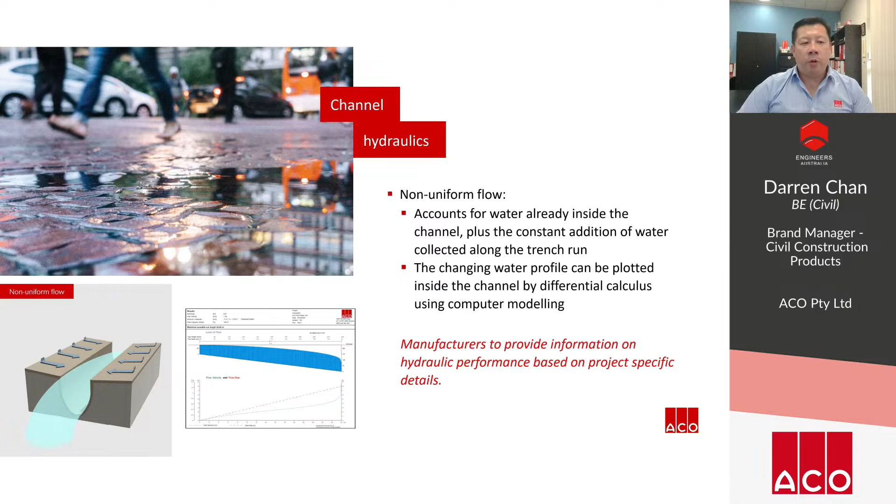Beyond the pure grate intake area, which is the open area of the grate, there are other factors that influence grate hydraulics, including the slot size and orientation. The number of slots and the raised slip-resistant nodules also impact the flow of water, as they slow the flow down and help direct the water into the slots.

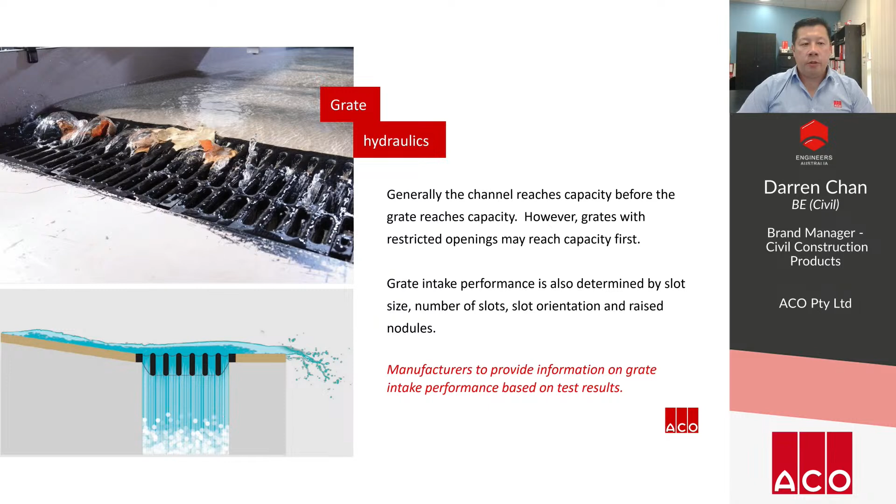ACO in Australia was established in 1994. Over the years, ACO has expanded beyond polymer concrete channel and pit production, and now manufactures stainless steel trench drains, rotationally moulded plastic pits, and mild steel fabricated access covers from our head office at Emu Plains in Western Sydney.

ACO product brands include ACO Drain, our range of architectural and commercial trench drains manufactured from polymer concrete with a wide selection of grates. ACO Infrastructure is our drainage channel specifically designed for heavy transportation infrastructure applications. ACO StormBrixx are modular underground stormwater storage tanks for retention, detention, and infiltration. ACO Access is a range of discrete access covers, and ACO CableMate is our cable pit and cable ducting range.

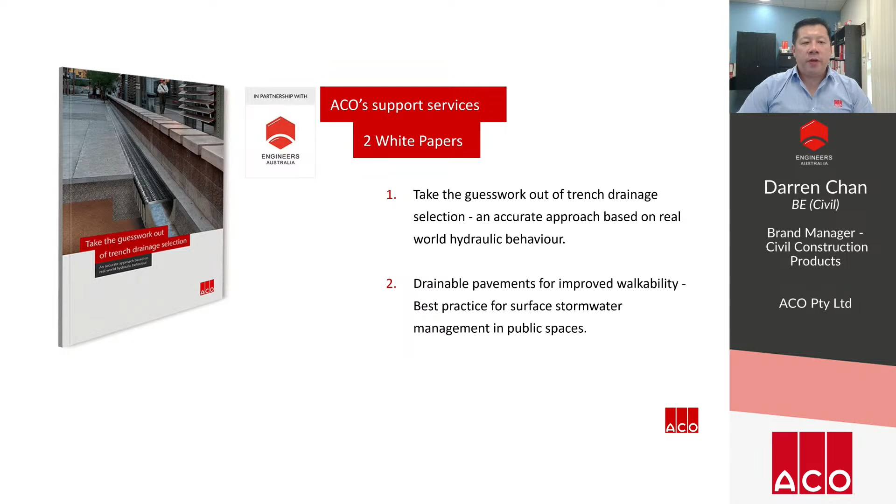ACO can assist with your next project. We have do-it-yourself online programs that provide quick, instant answers for your preliminary design.

Programs include HYDROlite, a trench hydraulic program used to size up or check the performance of your trench drain design. GIC is the grate intake calculator, showing the performance of your preferred grate based on experimental test data. Scheduler can draw simple trench drain runs and provide layouts, long sections, and a bill of materials to assist in procuring and installing the products.

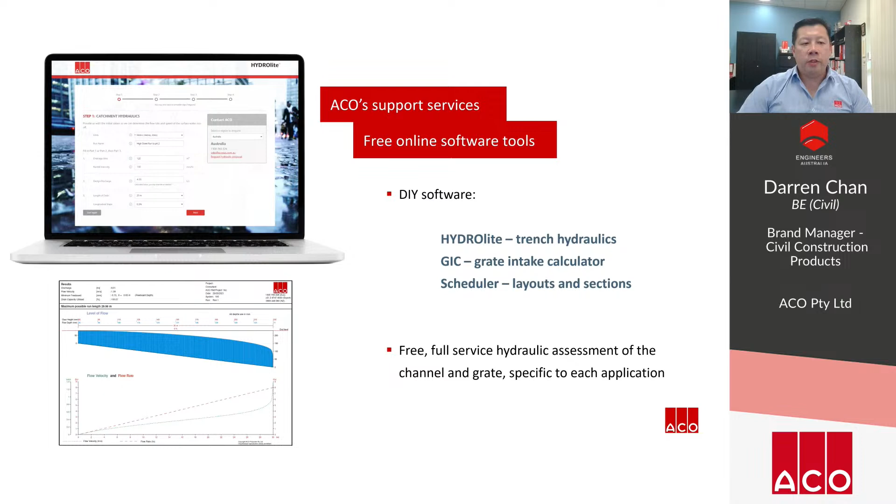During detailed design, you can contact ACO's technical support team for an ACO proposal with full hydraulic documentation, along with information to assist with your specification, such as general installation details, specification clauses, and product info.

Lastly, just to reiterate that we are here to help with all of our products. askACO.com.au is how we capture all of the services that we offer. So you can head to this site to access the channel hydraulic service, grate intake calculator, and design request forms, and so on.

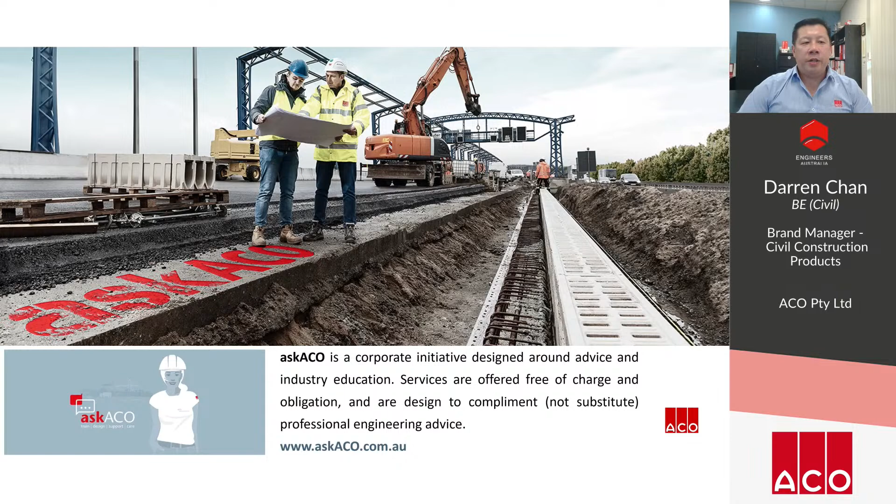We have two websites. The first is on commercial drainage in urban, public and commercial areas. The second is on specialist drainage for transportation corridors.